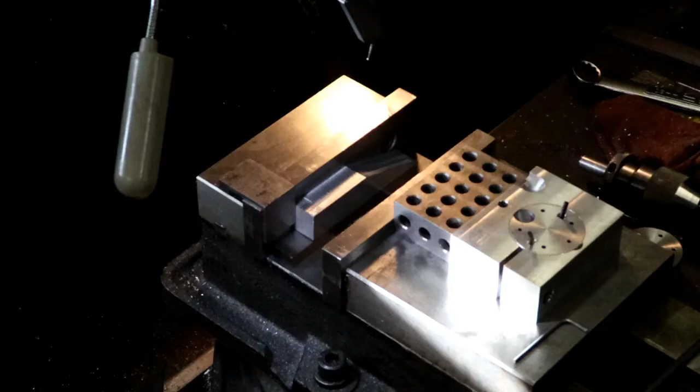Okay, I kind of messed up a little bit. I should have did one more cut, actually two more cuts on the cylinder head before I took them out. But that's okay, I can reload them. I just take them and put them up. I got two 1/8 inch dowels. Put it up here, up against a 1-2-3 block to square them up, and then tighten them up.

So now let's get it in here, get it dialed in, and we'll make a cut here. I really don't have to have a stop, but I'm going to put a stop there like I had it.

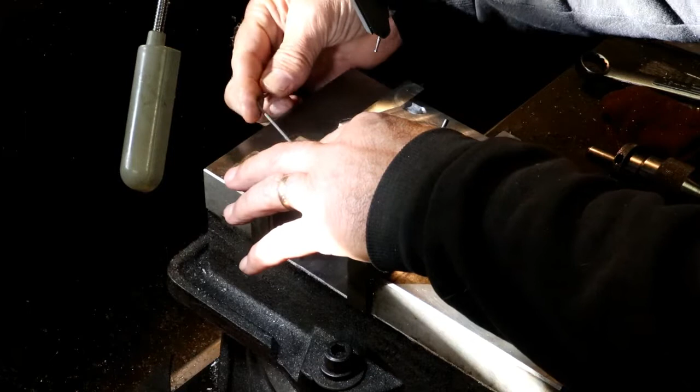I got a fan running. My furnace blows all the heat to the garage door end and I'm working on the opposite end, and it's pretty cool. I think it's like 12 or 13 below out. Below 0 Fahrenheit.

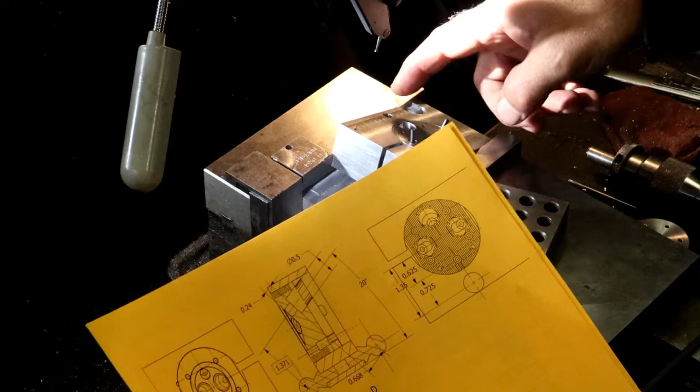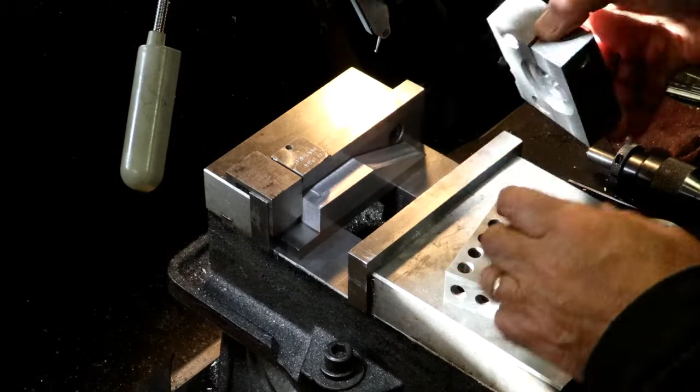Alright, so now I'll dial in the ball and then come out my distance, which is from the ball out. Oh, I got this located backwards. I got to turn it 180. That's okay. You just put it in out here, and we'll loosen it up, turn it 180, put the 1-2-3 block up against it. The 1-2-3 block locates it this way, and plus I push it up against the face so that it's extended right up. The cylinder head is right up to the face.

Oh, I should put my setup part in too, not the good one. Let's see if I can find it. Don't want that one. Put the right one in so that I don't... not that one. Not that one. Not that one. Must be this one up here. I've got one that I had sitting on top of the crankcase. And not that one. Alright, where is it? Or was that the setup part?

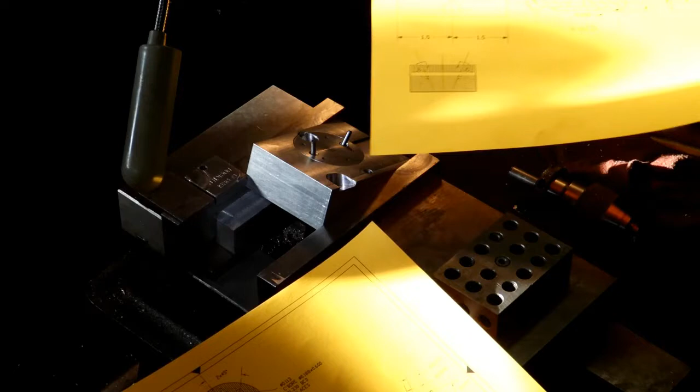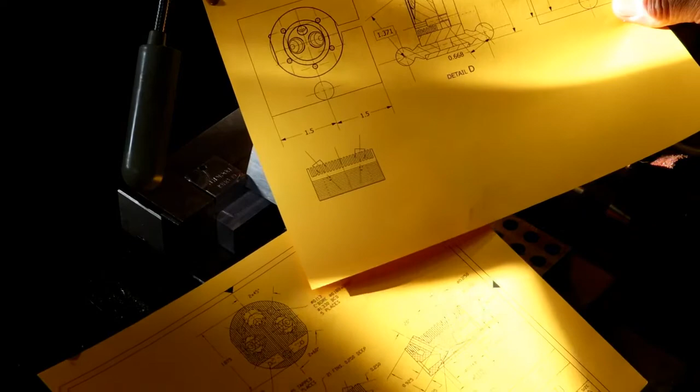Now, I didn't put the height of that, did I? Darn it. It really doesn't call out the height. I was going to get the height from the tooling ball down to the top of that. So I think I'm going to go back into my computer and get what height those ramps are. I'd like to keep them to the right height, so that way when I make the rocker arm towers, they're the right height.

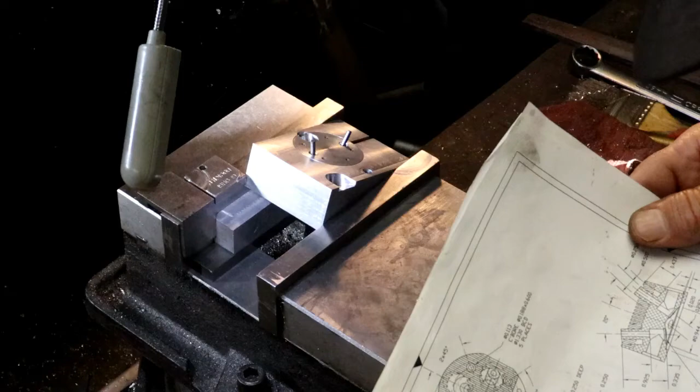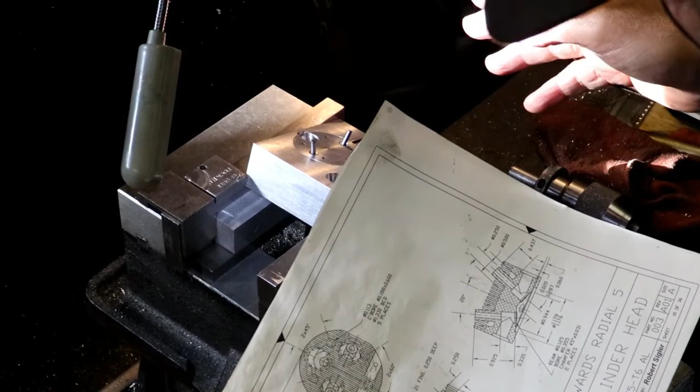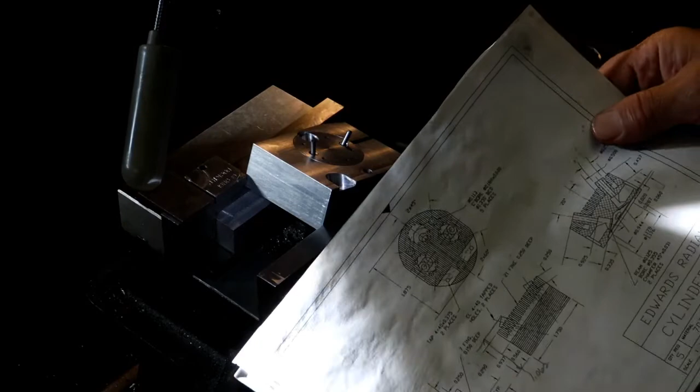I don't believe that it's on the main drawing. Because I did notice that there were a few things that were dimensioned from the top of the pushrod tower or valve tower, and that I don't want, because I don't know where they're really at, because I didn't do that per dimension. So I'd feel more comfortable coming off of the tooling ball. So I will go in on my model and I will get the height of that from my tooling ball, and then I will be back.